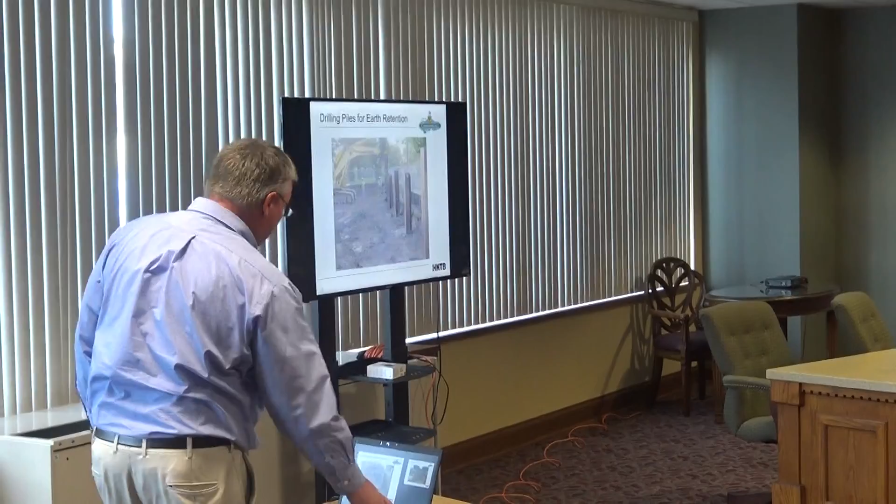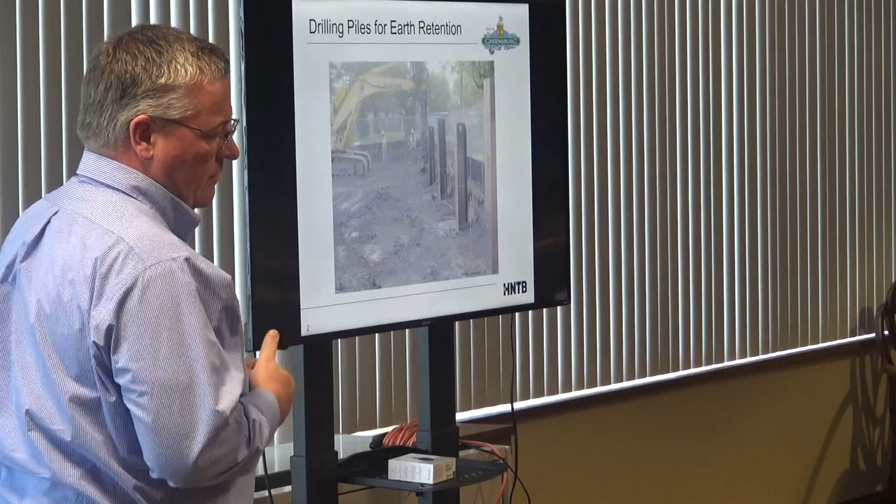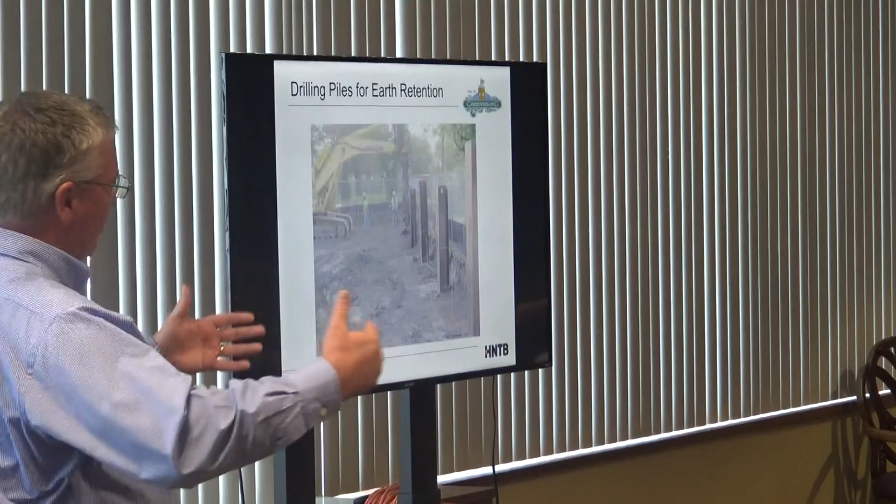Here's a photo of drilling the piles for the earth retention. This is the location just north of the existing plant number 3, to the very east side of the property. These are steel piles that were drilled to create an earth retention system, basically a form to hold the dirt back so they can create the hole for the clear well.

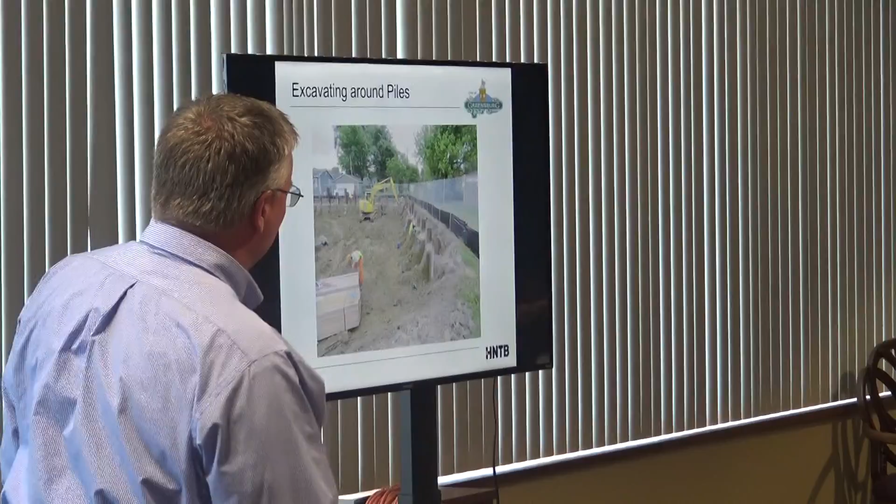And there you can see a couple more. You can kind of see the turn they're making there in the southeast corner. You can see the house in the background there, and those piles are pretty much right on the property line.

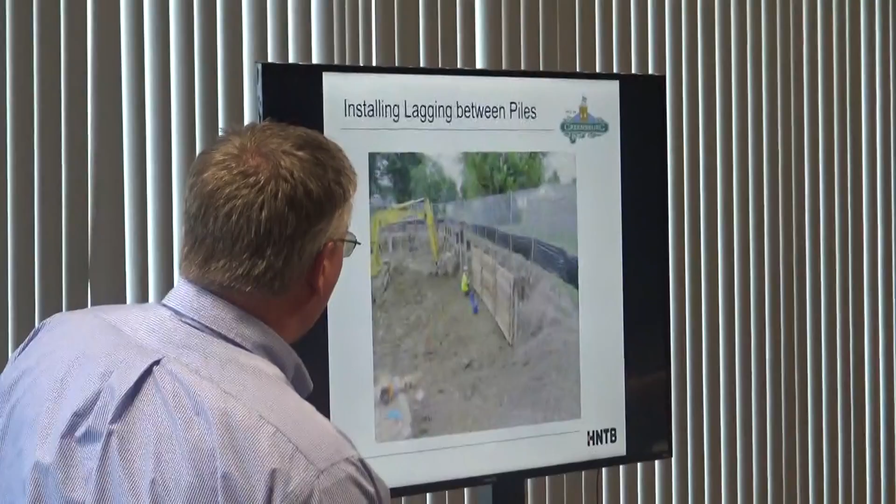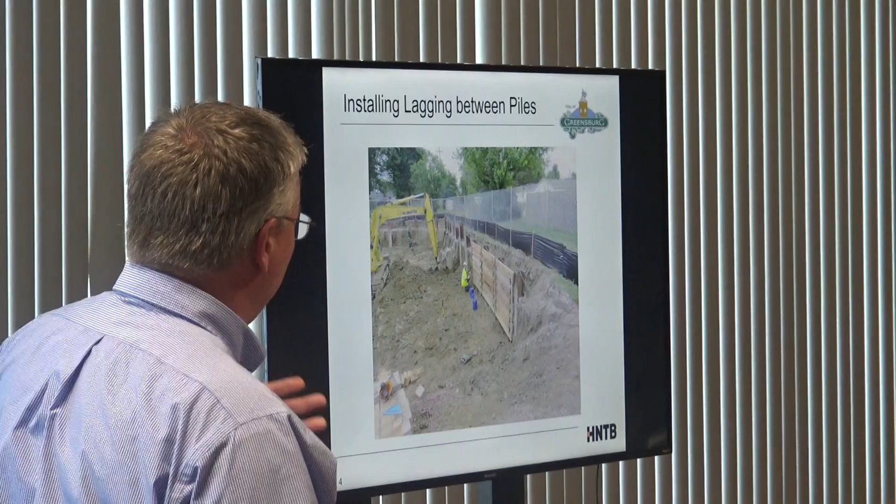And there you can see the lagging being installed, the first 4 feet of that. Those are basically large timbers attached between the piles, and that's what holds the earth back. There's some more — I think we're pretty close to the bottom at that side there, on the east side.

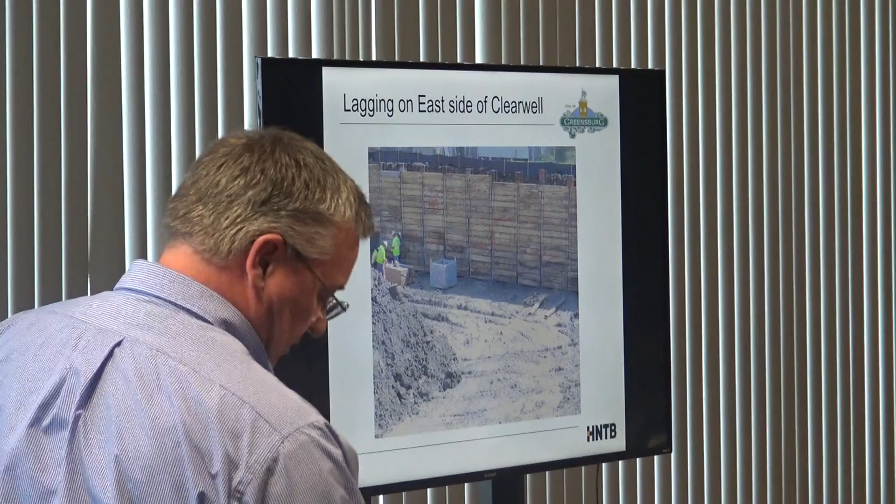This is excavation. This is the area here, you kind of see where the clear wells go. And then this excavation over here is where the pump station is.

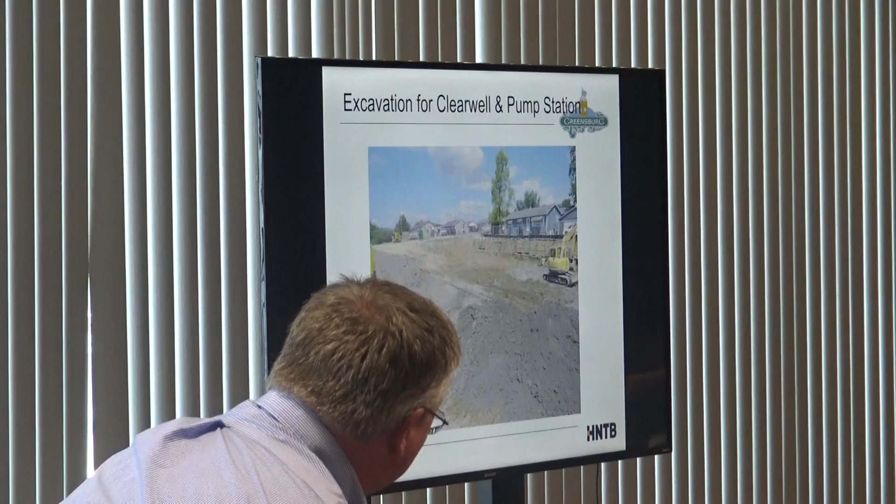This is from a while back, a couple weeks ago. Then they're at about final grade, right in this area again, this corner. We did have a little water that we ran into — you can see a little bit there.

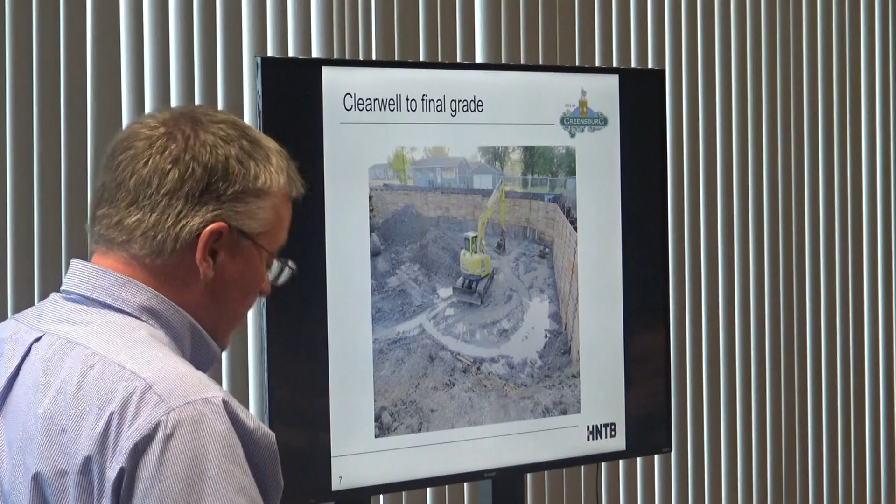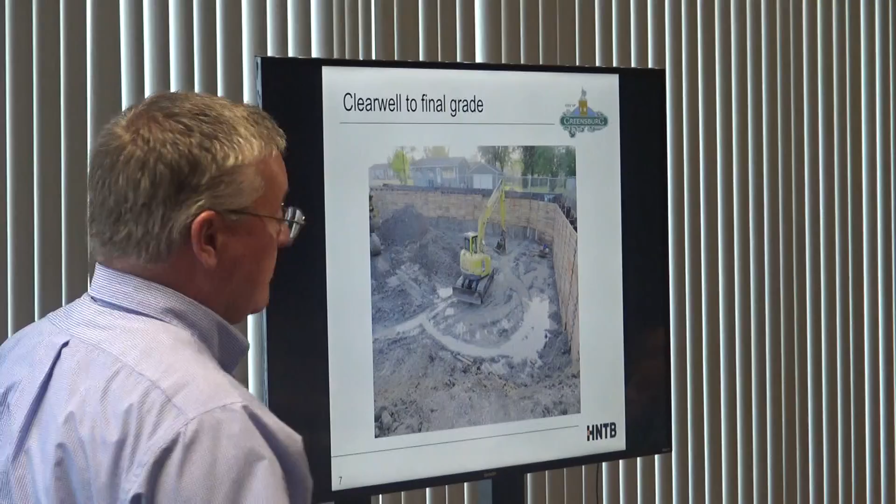It has been very dry, so they ended up — I don't think they have it in this photo — about in this corner right here, putting in a small sump pump, and they trenched a little French drain along the perimeter here. That's really dried up the site, so I was actually pleasantly surprised. This may look like a lot of water, but it's not.

And here they're starting to drill the first micro pile. They're drilling this and sticking concrete and rebar piling down, I think it goes roughly 25 feet or so. That's what will support the slab for the Clearwell.

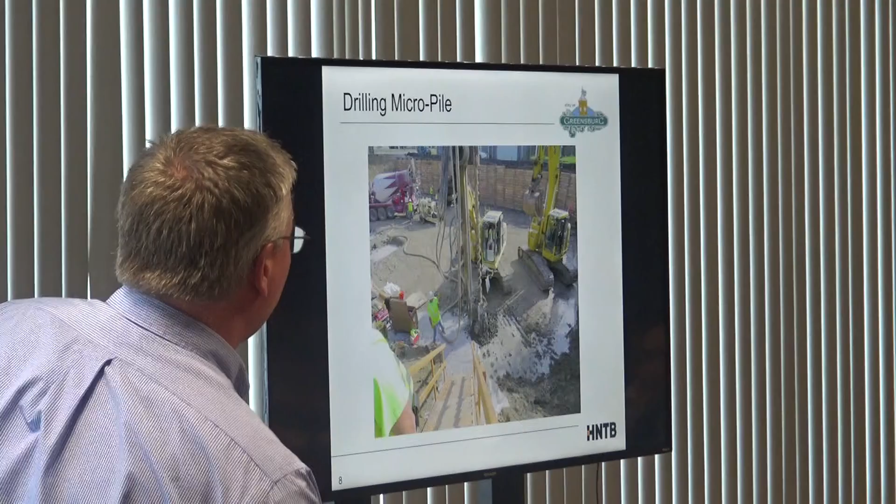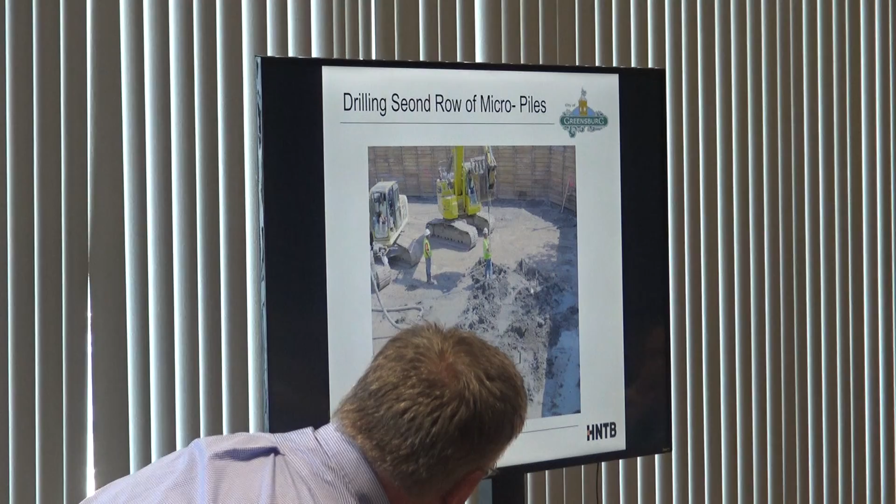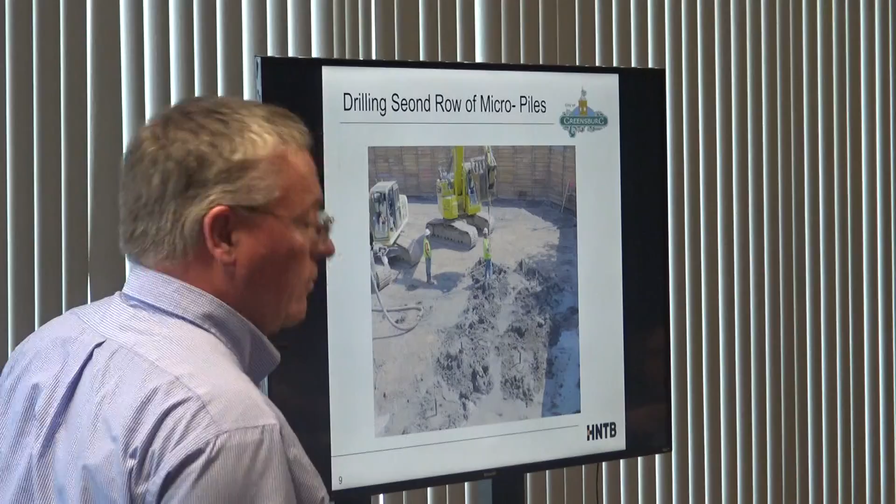So there's several of them that drill. There's kind of the length of how long they are.

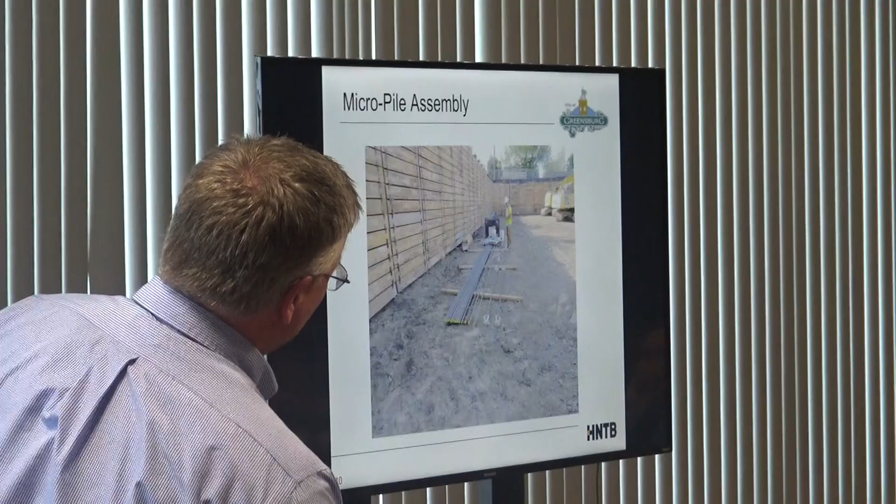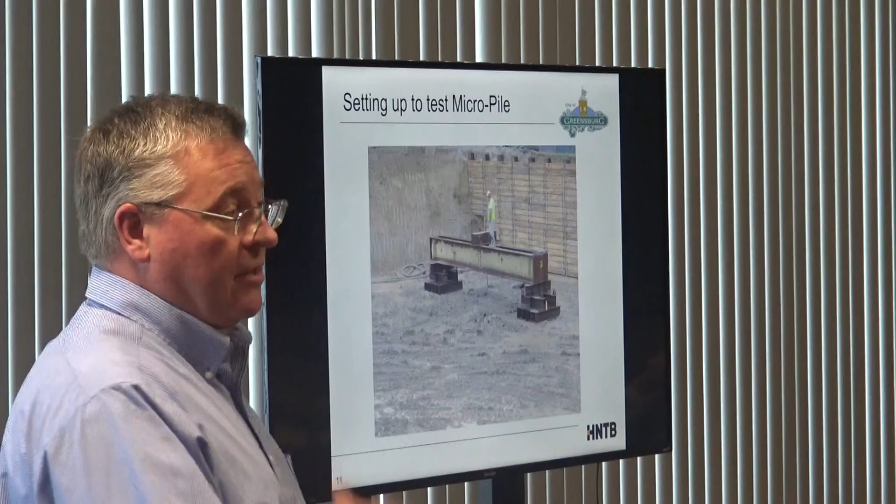And then this is a mechanism that they had to test. We required them to do testing on one of them to make sure it didn't have any uplift and would be able to support. So they have this thing here where they're attaching so they can pull a force and try to pull this out. Basically, after you put it in the ground, they try to pull it out and see how much force it takes and if it has any movement. And that's the setup to do that.

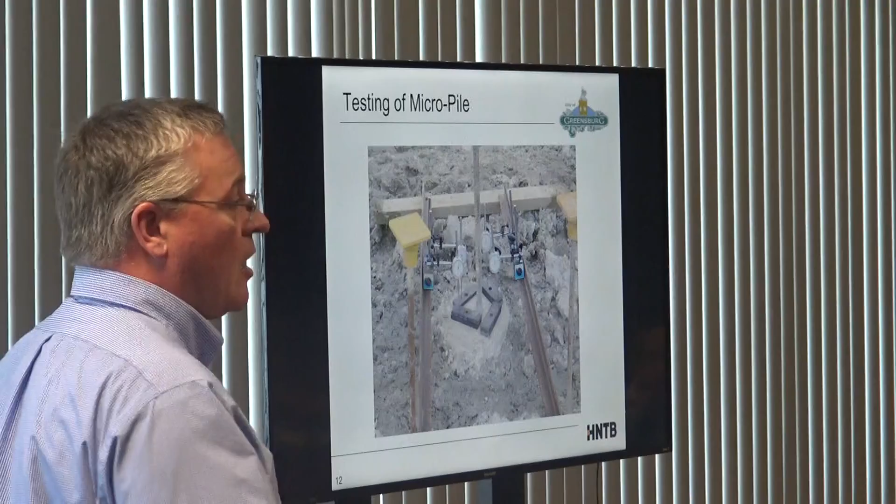And then you can see how precise they get, how they're testing how much movement — we're talking about thousandths of an inch in some cases. As long as that test passed, we have very similar soil conditions across the entire site, so we're pretty confident that once we have one test we shouldn't have any failures. That's where they spent a lot of time last month.

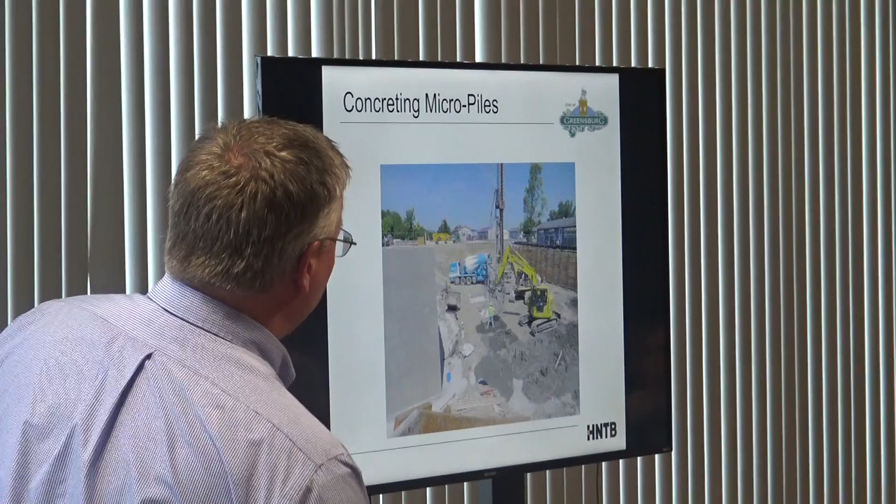And here they're just pouring some more, putting concrete in those after they drilled them out. And we'll move on to the pump station.

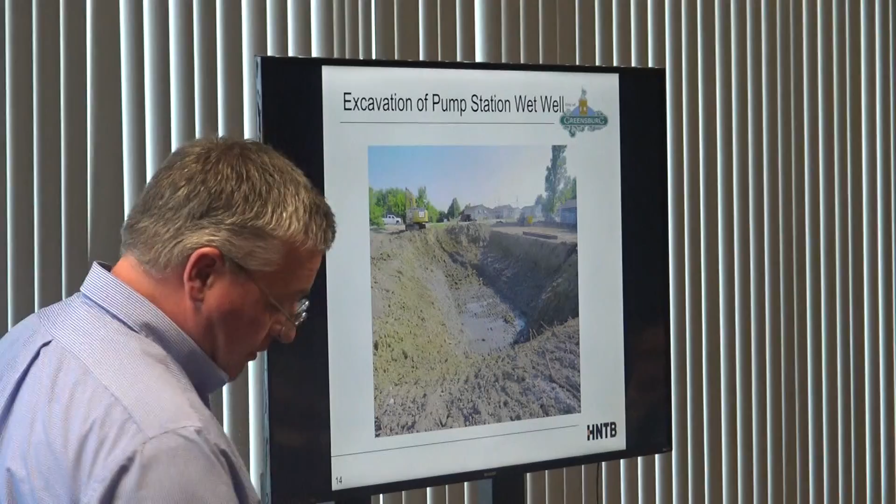Well, this is the deepest excavation of the site, so we are right at about the bottom of the excavation there. As you can see, there is a little bit of water — again, not a whole lot to worry about.

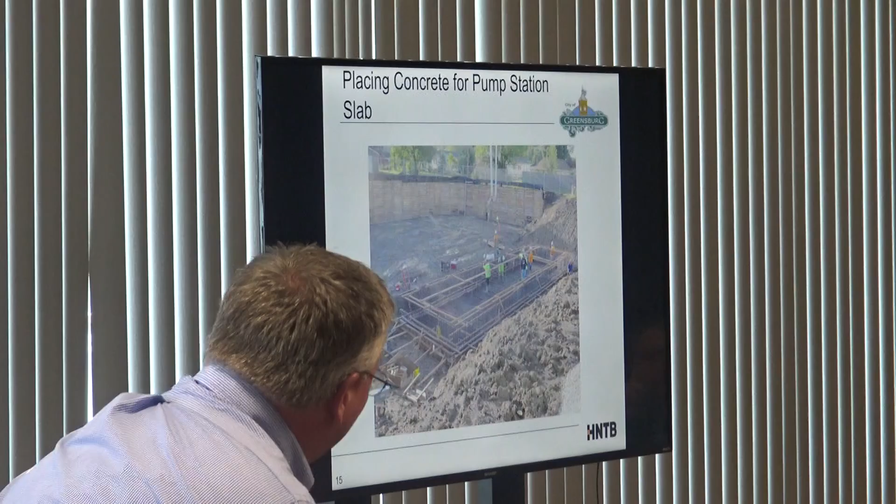This wet well is basically where we've got some pumps, and that's where they'll pull the water after it comes off — they'll pull from the clear well. So once the treatment plant makes the water through the filters and treats the water, it will be stored in the clear well, which is going to be the tank behind that. Then it will flow into this wet well, and that's where the pumps will pump it into the distribution system.

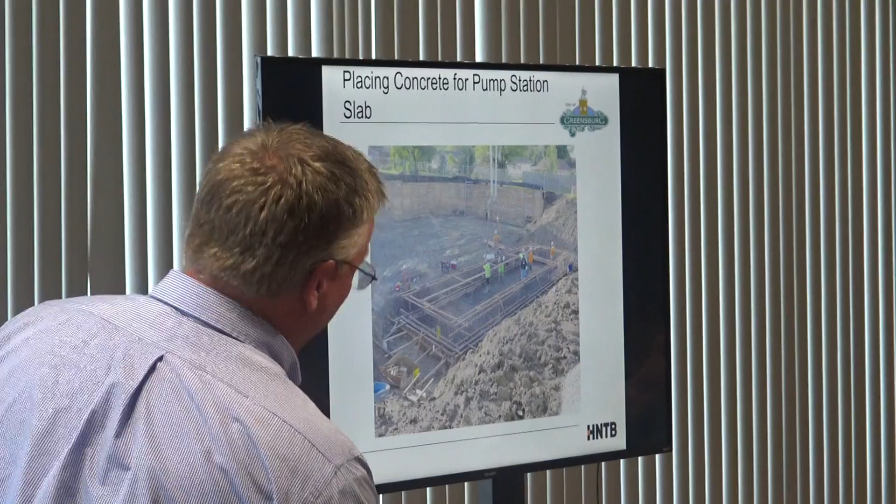So this will all be finished water. Both of these tanks will have finished water in them. There's a slab placed.

They are curing the concrete with what they call a wet cure. Basically, for 7 days they have to keep water on it and keep it saturated so that the concrete cures better with water — the more water present, the more the concrete will cure. So they're using a wet cure.

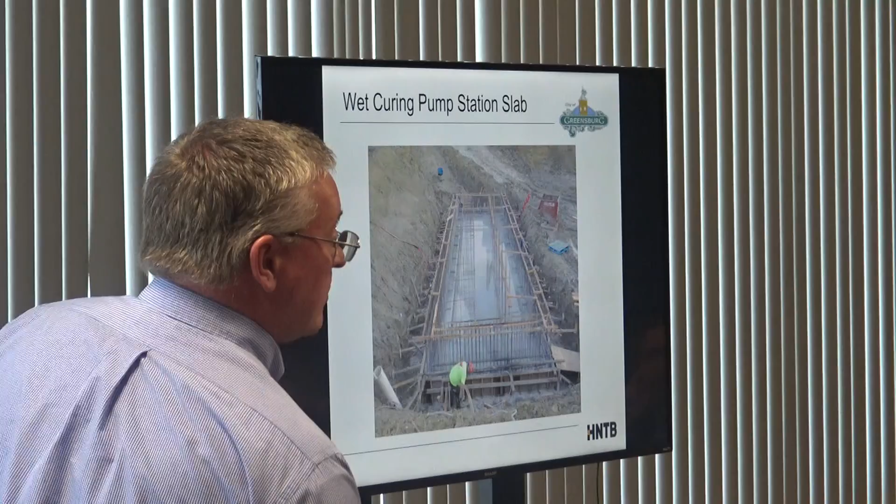It's easier to do on a slab. The walls are going to use a product they can put on instead of using water cure for it. And they're forming up the rebar for the walls for the pump station.

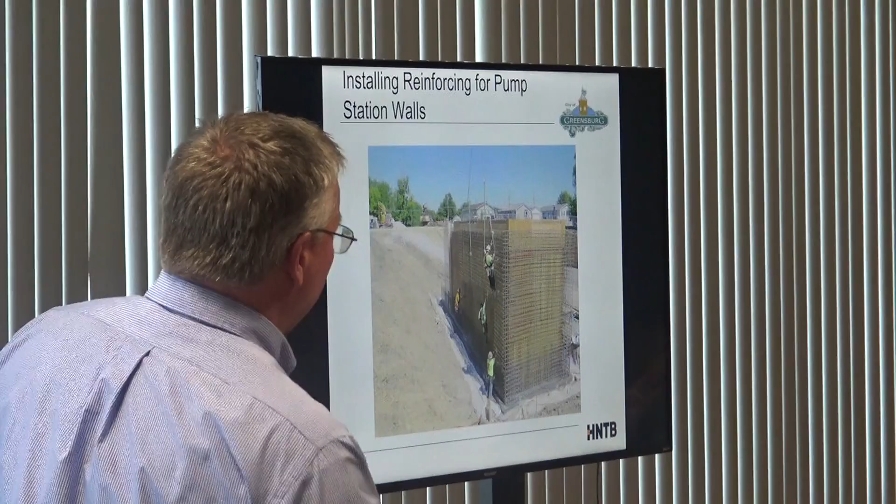Again, most of these mats were actually tied on the ground and then lifted into place. Most of what you see there is just finishing up a few ties to tie everything together, so they didn't have to spend an entire time hanging off the wall like that.

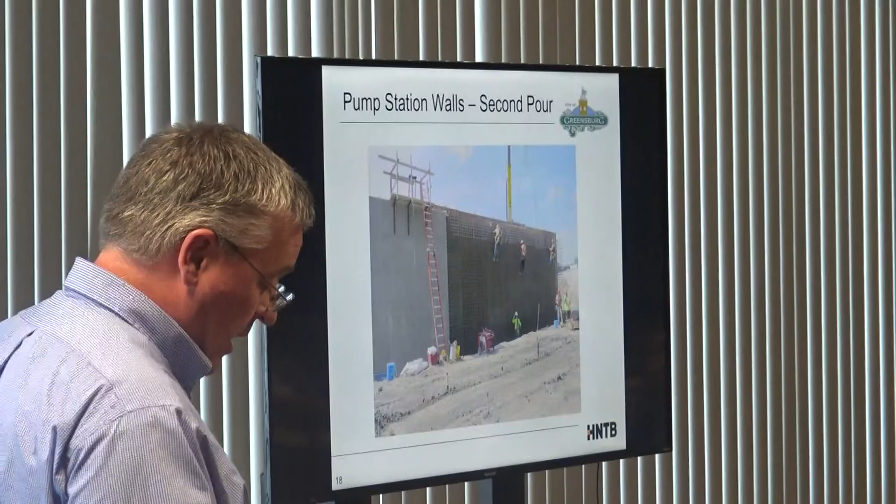And this is a second shot. They poured that pump station wet well in two pours. You can see the first pour here to the left is done, and they're forming up the second pour here, and I believe they poured that on Monday. So that tank's walls have now been poured.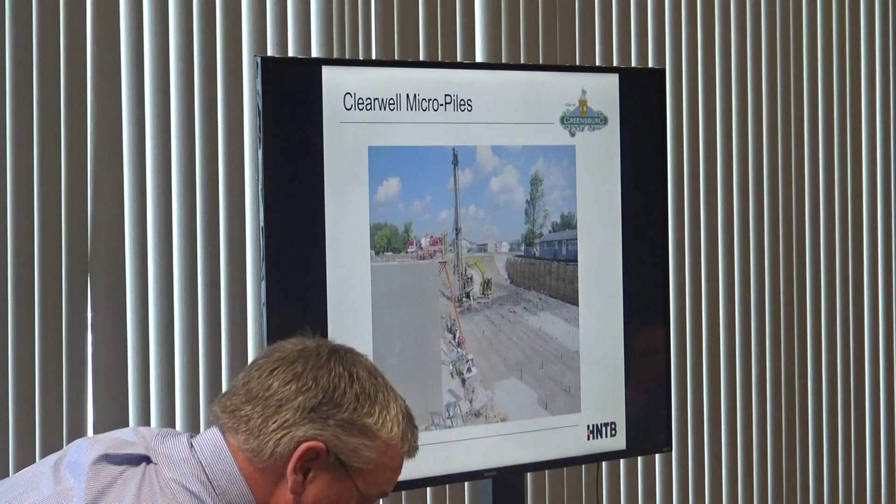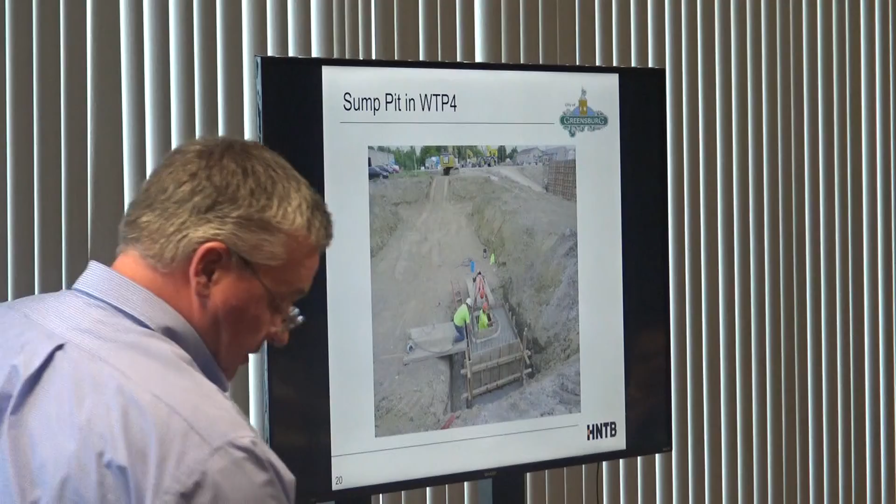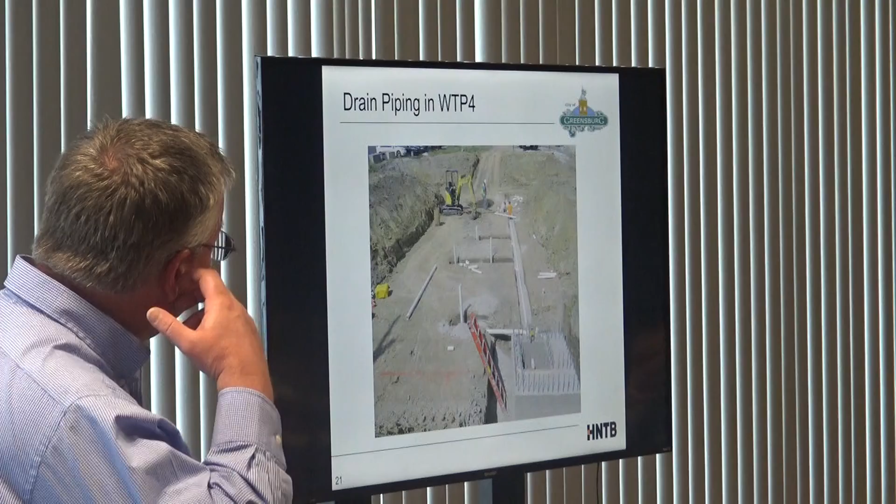And now we're putting in the drain lines, or the floor drains. You can see the plumbing in place there. It will all tie back into this pit.

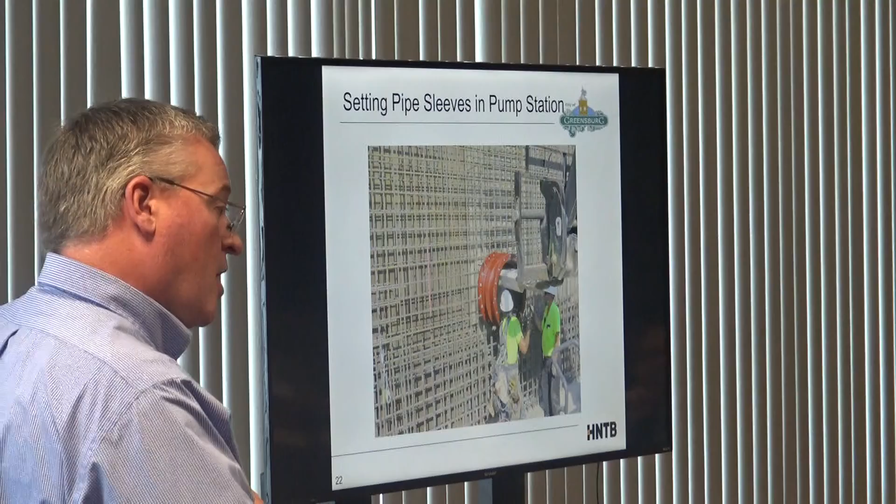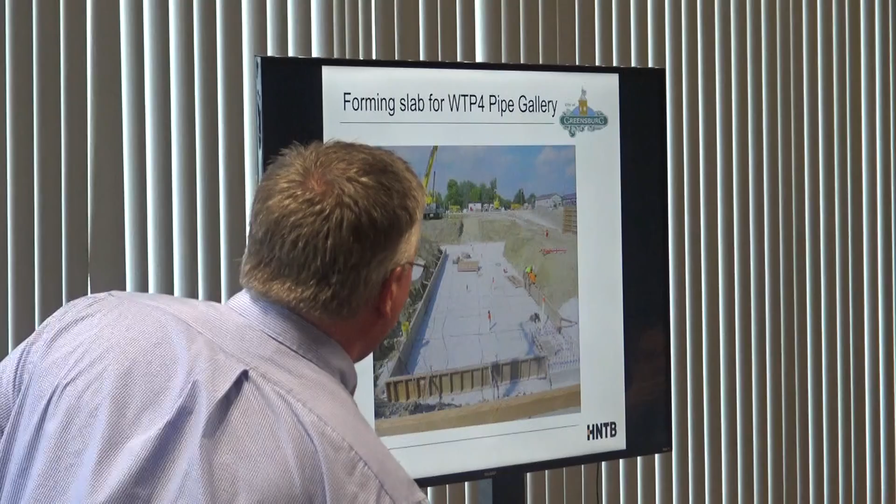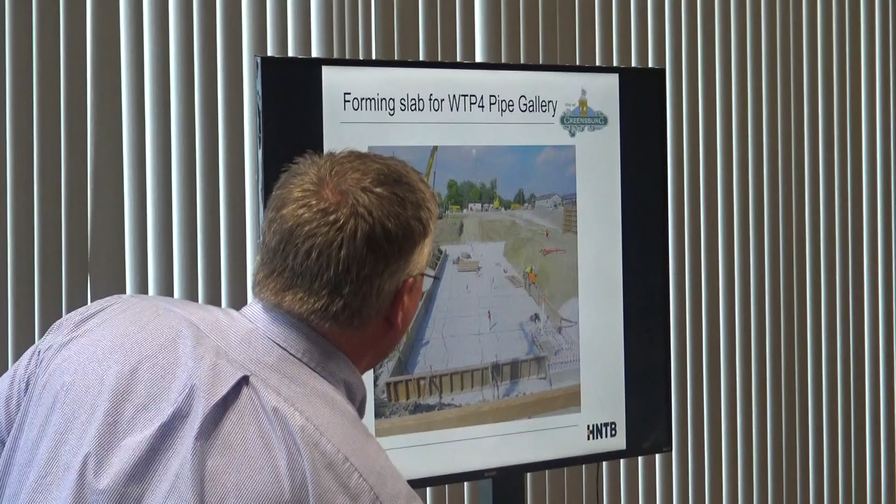This is a T-shaped excavation, the T-shaped basement. So you've got a long, narrow section, and later on there'll be filters on both sides of this, the bottom half of the T. This upper half of the T will be kind of a corridor that connects the filter area to the area where this crane is setting now, which will be the office area, the lab, and the offices, lab, locker rooms, that sort of thing.

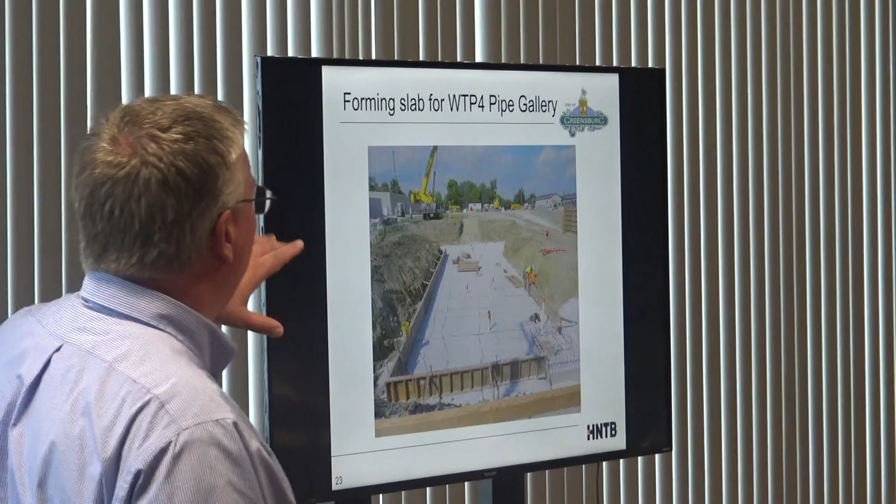What I consider the office side of the treatment plant, along with the chemical feed rooms, will be along the west and north side as well.

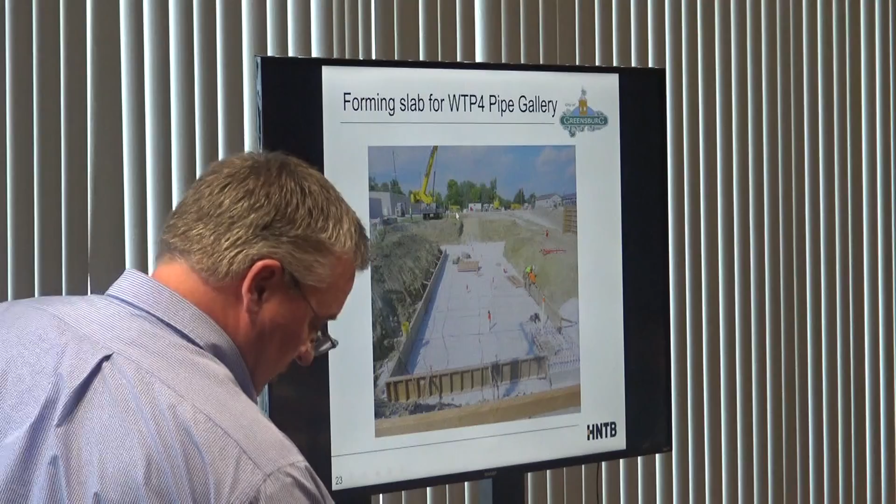So that's it. Any questions? I went through that pretty fast. So any other photos you want to see again?

Looks like they're making good headway. They are, so far I would say that the weather's been great for them the last month or so. We haven't had a lot of rain. It's perfect. It hasn't been too terribly hot.

They have it good that IMI, the guys that supply the concrete, are only basically less than 7 miles away. So I asked them if they've got commitments for that, and they said yeah, they're committed to provide all our concrete. So that's a plus too—they can schedule bigger pours that way, and they don't have to worry about the concrete getting too hot in transit.

So that's to their advantage. If all goes well, I would say that they will have all three of these structures up out of the ground before winter, which will enable them to continue to work throughout the winter too.

So right now I think they're a little ahead of schedule on a few things. I don't think they're behind on anything. They're trying to push a few things. They've got a couple things going.

They changed the foundation for the pump and electrical building. We agreed to allow them more of a step thing so that they can bring the fill up a little quicker, so they can backfill a little faster and work on some of the other areas, so they don't have to wait for that to cure in 28 days.